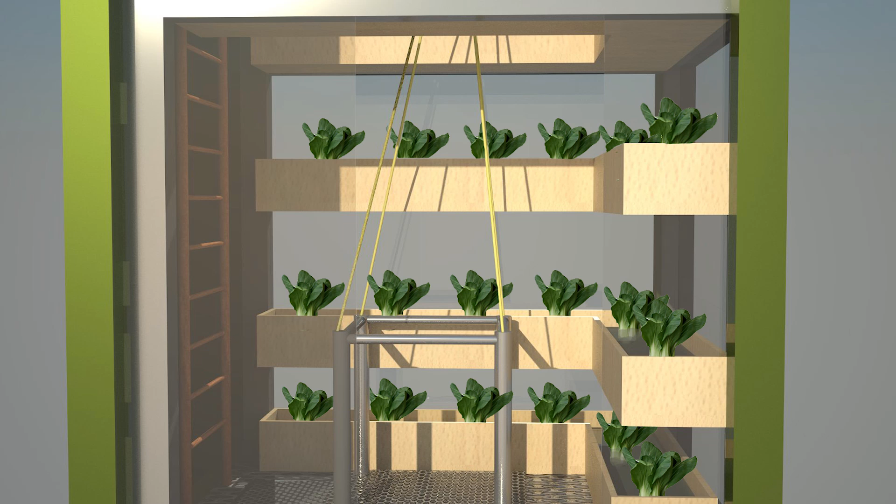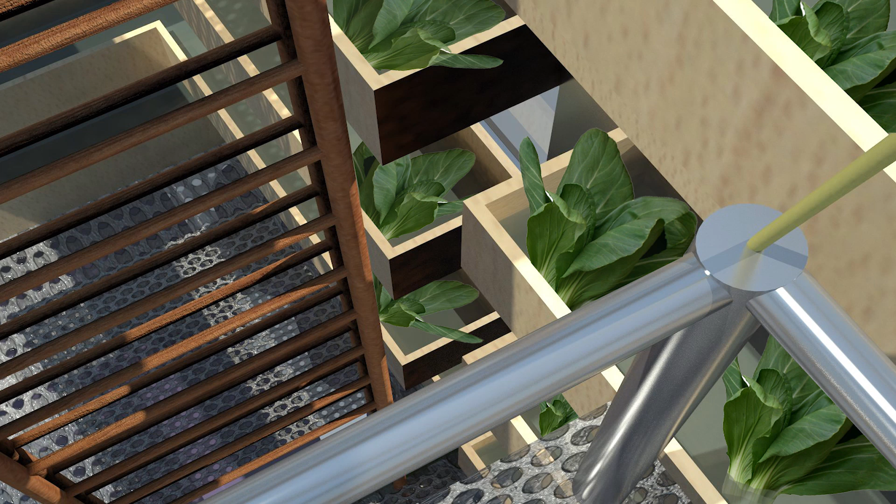The program I used to model these containers was Rhinoceros 4.0, which allowed us to model the container, modify it, and see how it would work structurally and how different materials would look. We could check out different heights of the grow beds to see how much we could change the structure and how we could modify it to the most practical means possible, and allow us to see how this model will look in front of stores, which will provide the clients with a great idea of what they can expect and how people will view this project from the street and how it will bring them revenue.

With rising global population, food security has become a high priority. Locavore and organic food movements have been continually upswinging in the United States. Food consumer markets are ready for serious, scalable, urbanized agricultural production. GreenTowers will deliver upon these urbanized locavore market demands, bringing organic food accessibility to limitless, small-footage urban spaces.

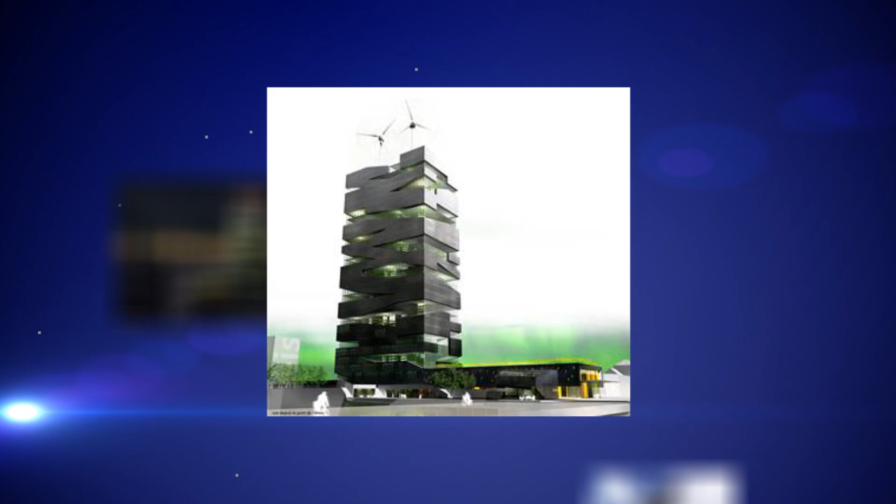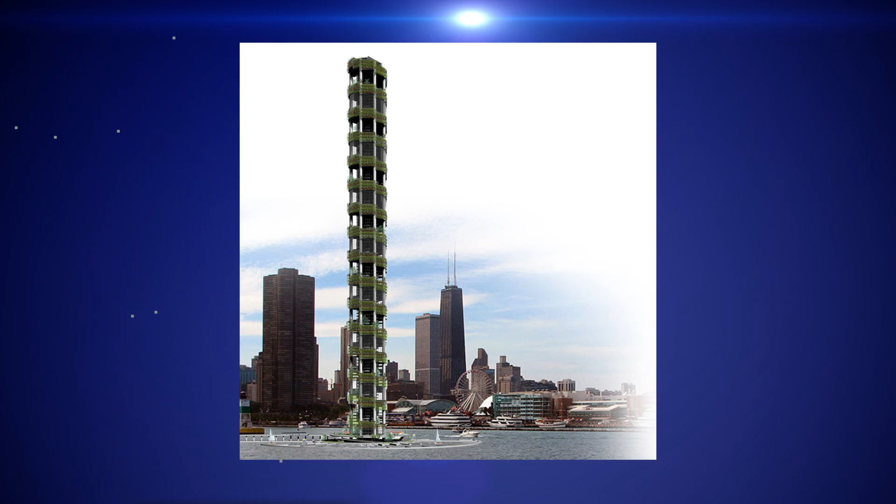Dr. Dickson Despommier's brainchild concept of vertical farming is in many ways the inspiration for a lot of our own concept ideas. But vertical farming never quite gained the momentum that many agricultural entrepreneurship optimists had hoped for. It was held back primarily by the astronomical costs of starting up a skyscraper farm, and also concerns about light penetration into these large diameter buildings that most vertical farms are, because they're designed to look like skyscrapers.

Our considerably smaller idea with GreenTowers will experience neither of these startup hindrances. Its diameter is small enough that light penetration will not be an issue at all, and the startup cost for somebody to purchase one of these to go into urban farming is extremely minimal.

The manufacturing renovation process will transform old and arguably wasted shipping containers, or ISBUs, by converting them into vertical greenhouses. This will be done by stripping the containers of three-quarters of their lengthwise corrugated sheet metal siding, and then retrofitting these sides with three walls of greenhouse acrylic polycarbonate transparent window paneling.

One of the greenhouse's vertical walls will remain opaque, as it is made to be the shipping container's horizontally reinforced floor. By keeping the single opaque sidewall, we will preserve the shipping container's ability to be transported, allowing the GreenTower to have minimal assembly upon delivery at essentially any location. The single opaque wall will be positioned on an individual installation basis in order to maximize light delivery at any given location.

The opaque side could also be positioned against the exterior sidewall of an existing building.

GreenTowers floors of plant growth will be placed at 8-foot intervals with 2 concentric U-shaped rings of grow beds on each floor. This means that in the 20-foot container model, we would have 4 grow beds, and in the 40-foot container model, which is twice as tall, there would be a total of 8 U-shaped grow beds.

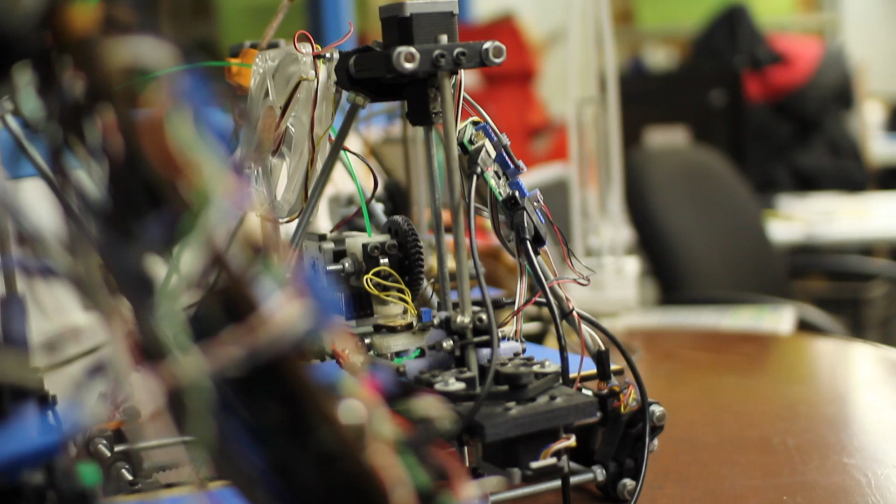A regular shipping container is meant to be transported on a horizontal level. We need it to be in a vertical orientation. So how do you do this? Our theory is we take a triaxle dump truck, like you'd see on the road today, and modify it in a few different ways. Basically put hydraulics to change the center of balance on it, and also attach a modified industrial winch, so that the truck actually turns the shipping container upright and then drops it and places it in the orientation it needs to be.

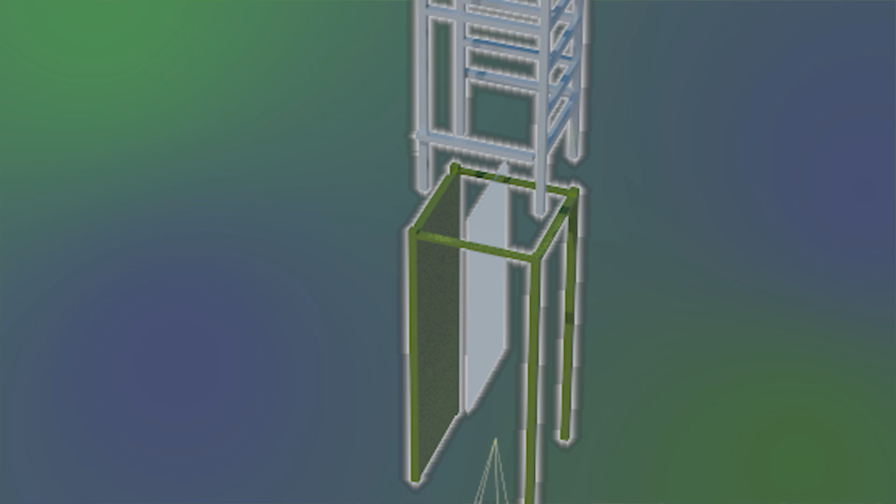So actually, underneath your feet when you walk through the greenhouse entrance of GreenTowers will be the fish tanks, and the fish, you'll be able to see them visibly swimming beneath your feet through a sort of metal grating that will be like a polished stainless steel or something aesthetic like that. As soon as you walk in, you'll see the fish underneath you, and that'll be part of the experience.

Also housed underneath that trapdoor platform will be the various stages of filters, mechanical filters and biological filters for solid removal. All of the plumbing and sump tanks will be housed underneath your feet, and you'll be able to see the fish swimming beneath you.

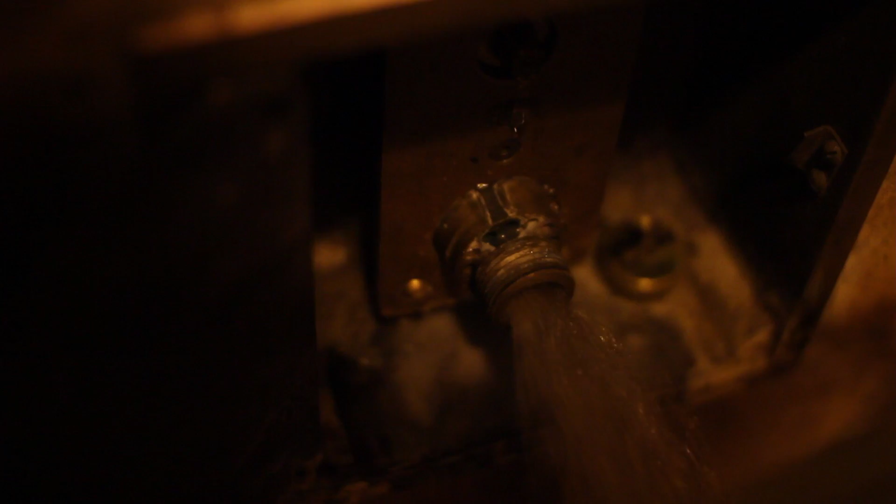The GreenTowers design calls for 2 pumps, which can be regulated completely independently and conjoined together. Both pumps move out of the sump tank in the middle. The first pump controls the aquaculture tank, which has to pump at a gallon per hour rate equal to the number of gallons in the aquaculture tank. For our 500 to 600 gallon tank that we will install, this will pump at 500 to 600 gallons per hour.

The second pump will independently operate the flow rate through the grow bed. It can pump continuously, and we can also adjust the flow through the beds for different crops, for experimenting with different sorts of crops or with energy savings. So the 2 pumps make the system a lot more modular in terms of control.

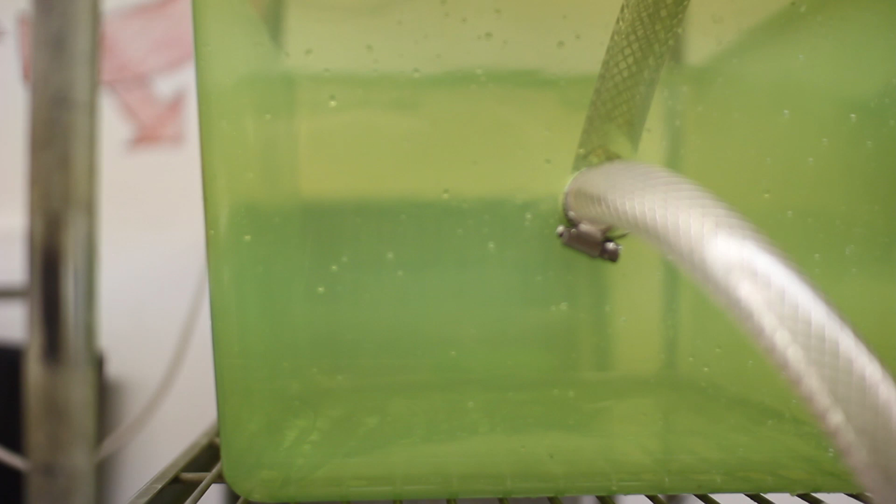Floors of concentric plant growth within the green tower will be accessible by a central pulley platform that moves between the U-shaped grow beds, as well as a backup access ladder. This pulley platform will be designed for efficient vegetable harvesting so that you can make a sizable harvest while on the platform and minimize the need to go back up and down the tower throughout the day.

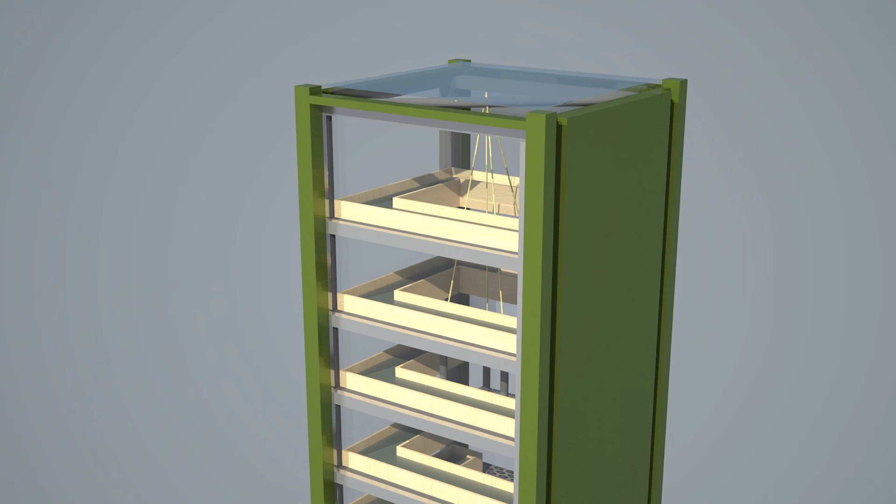In terms of temperature relief systems for the GreenTowers system, summertime temperature relief will be very easy to take care of. Since the Green Tower already has water being pumped through it constantly, it'll be really easy to employ a sort of passive cooling pad where you just run a fan next to the cooling pad for a simple evaporative cooling process.

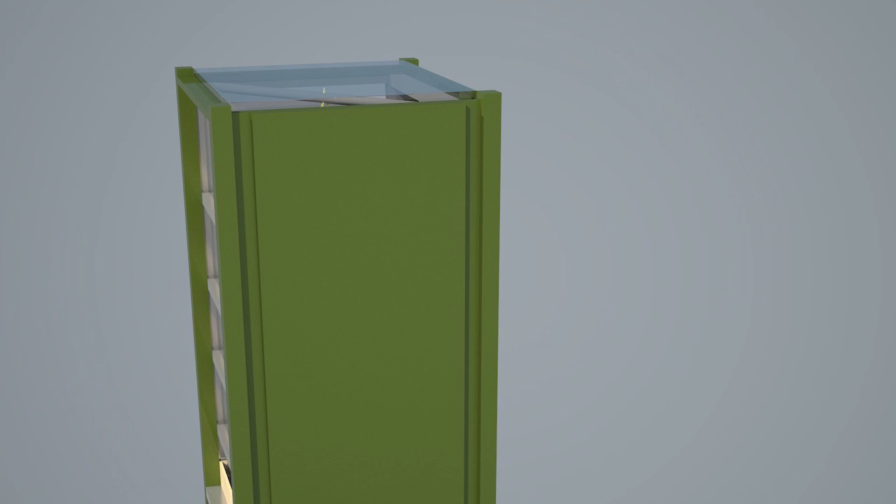And so we'll be able to essentially hook one of those up anywhere in the tower because there's water going through it at all points.

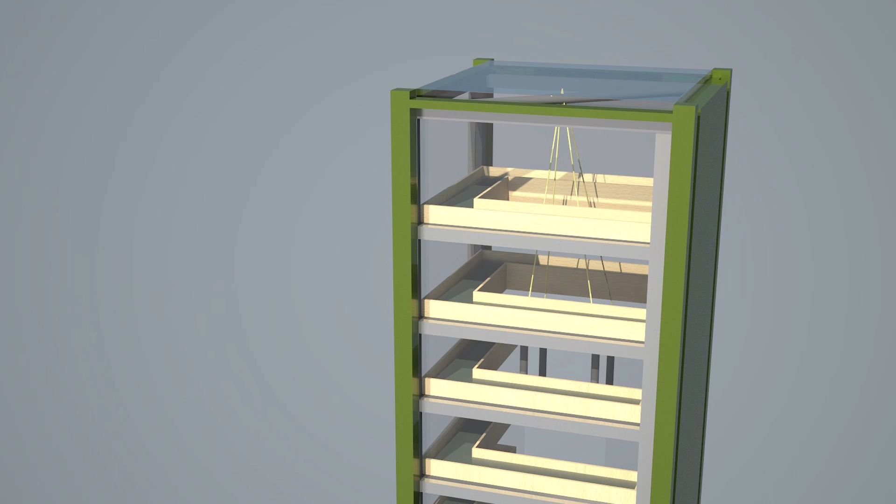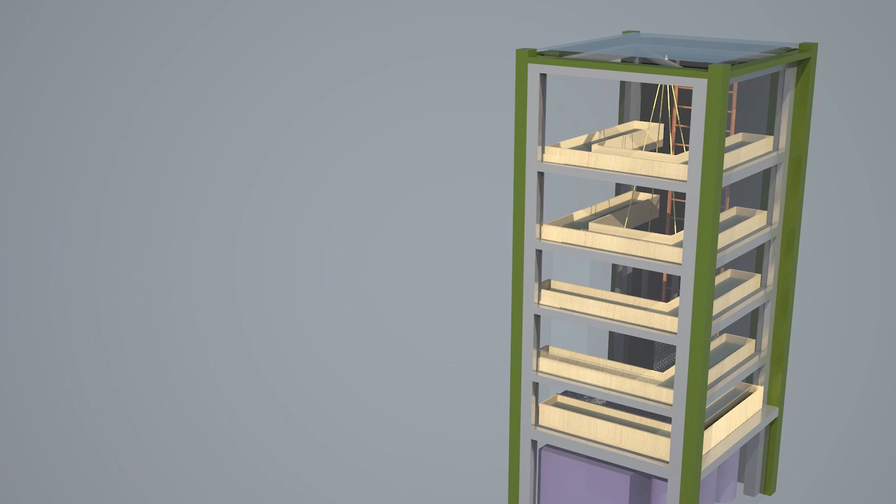In terms of wintertime temperature regulations, obviously the polycarbonate greenhouse siding that we have chosen is pretty adequate for most commercial operations, even into the winter months with the 8mm two-walled polycarbonate. But we're also really hoping to soon be able to prototype a nighttime curtain design. This curtain would be deployed at night, and what it would do is add insulation to the greenhouse as well as block light pollution that would probably take place in most city areas.

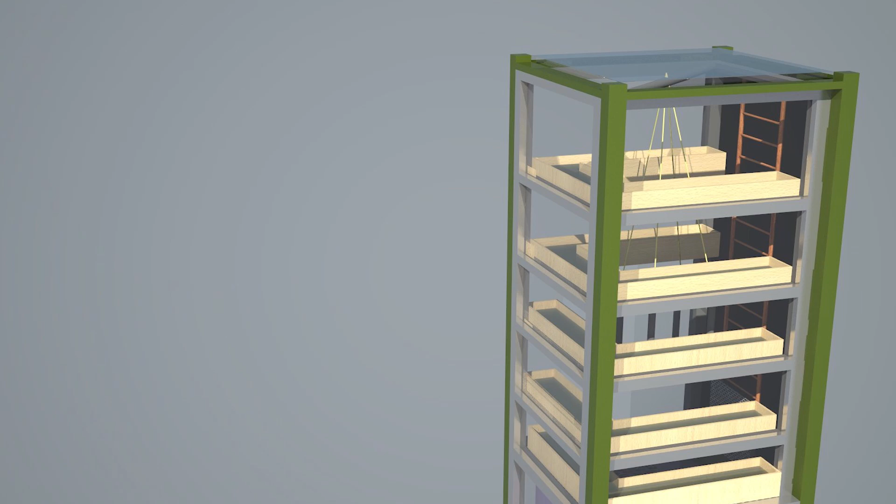In addition to those two main features, I think that a sort of nighttime curtain, which we're hoping to be able to build from the recycled corrugated sheet metal siding that we removed from the container, this metal curtain would also add a sort of nighttime security feature that we think would really be nice to have on the Green Tower.

So some theoretical revenue streams include production sales, which would be upfront, some upgrades, checkups and maintenance, and also a network for aquaponic microfarm supply management, with integrated ordering and delivering customer accounts.

So there's a pretty good variety of customer bases that GreenTowers could conceivably market to, and probably the biggest breakout market of those is the restaurant business.

If a restaurant can put a Green Tower in one parking space's area of its parking lot and produce all of the arugula that it needs, it doesn't have to order arugula twice a week shipped by a Sysco truck from Nevada. And it will end up, in the long run, definitely saving these kinds of restaurants who want to sustainably produce their own products on site a lot of money.

Another similar market is if there were vegetable producers within the city - we'll call them urban farmers - who don't actually own any land, but know 5 or 10 people in the city well enough that they can place a microfarm on each of their properties, or pay a small loan to lease that small amount of property. Then they can conceivably grow vegetables and source them and sell them directly to restaurants or fresh markets within the city without actually owning any farmland.